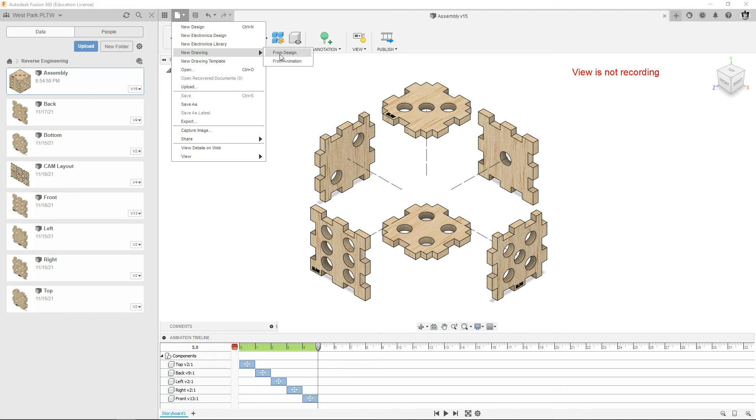We're going to go to our file menu up here on the top. We're going to hit new drawing from design. And some stuff will happen. Over here on the right, it's going to say, do you want to create a drawing? What do you want? The full assembly? That's what we do want. We want to create new, and then for template, we want WPHS A.

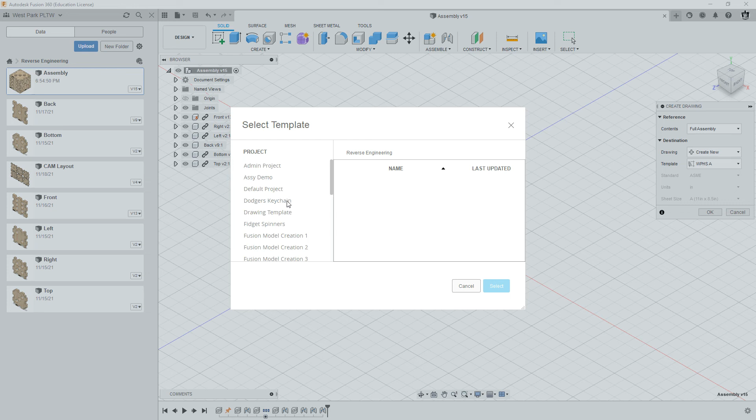If you don't have the template, then click here where it says template. You should be able to choose it. If not, you can hit browse and then go find it. It should be in one of your projects. I think multi-view drawing is the one that we put that in. So anyways, you get that template there, hit OK.

And then what it's going to do is take you into this new drawing. And so here's the drawing environment, and it'll pop up. You'll have a view of your die, and we're going to do multiple things in here. We're going to show a front view, top view, and side view of our assembled die, so we can put overall dimensions. What those are for is basically you want to know, if you've got to ship this thing, put it in a box, how big of a box do you need?

We also want to show an isometric view of it while it's assembled, so people know what the finished product looks like. And we're also going to show our exploded view so they know how to put it together and what the pieces are. Lastly, we're going to have a parts list, which shows the list of pieces you need in order to assemble one of these. And it's also going to have what are called balloons that label each part so you know which part each one is.

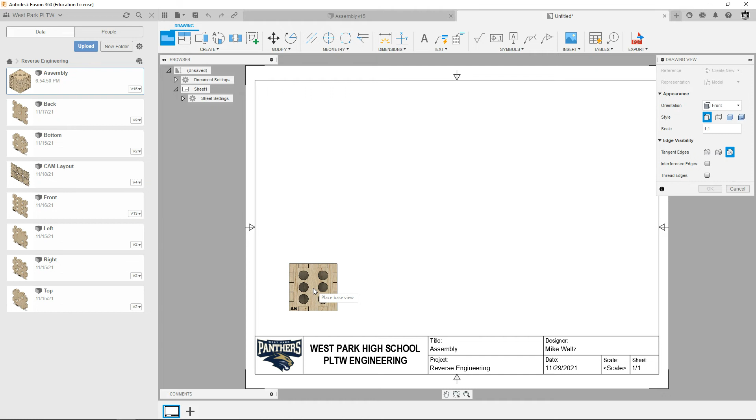Okay, so we'll do the easy stuff first, which is to do the front view, top view, right view. So orientation is going to be front. Style is visible edges. Usually in assembly views, you don't show hidden edges. We could if we wanted to, but let's just leave it off. And 1-to-1 should be fine to scale. So I'm going to go down here in the lower left corner and place that view. And then I should be able to hit OK. And then there's my view. I've got the front view of my die.

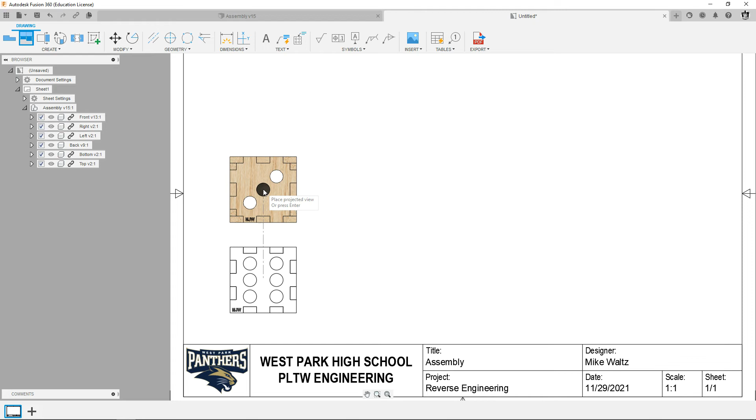We're going to create projected views. So I'm going to use a projected view tool. I'm also going to close this data panel because it's just taking up space on the screen right now. So anyways, this tool here, projected view, click on the front view, and then we're going to go up here. All right. And we'll get a nice top view of our cube. We're also going to go over here to the right. We'll make a right view of our cube. And then we're going to go up diagonally, top right, and make an isometric view. We can hit the green check mark. And there are our views.

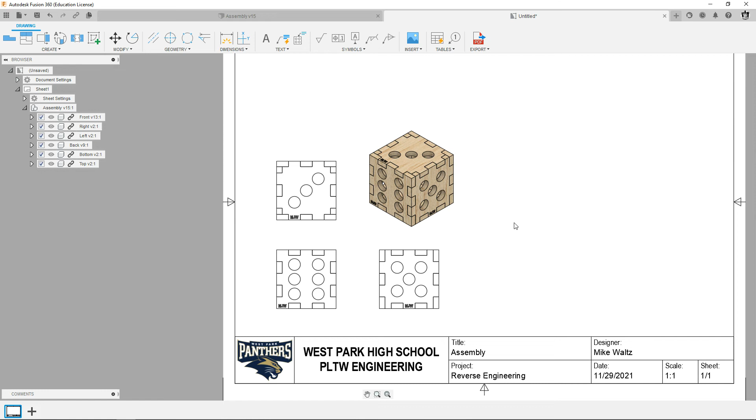We want to shade this view. So I'm going to double click on this view, move my mouse over it, double click, and I'm going to choose a shaded view and then close that. Okay, cool. So now we've got our isometric shaded view of the whole thing. We've got front, top, and right.

And we're going to put overall dimensions on here. So D for dimension, or you can click up here in the dimension tool. I'm going to put a height dimension down here on the front view. Put that right there. I'm going to put a width dimension here in the top view. And then I'm going to put a depth dimension over here in the right side view. Hopefully you remember what all those things are.

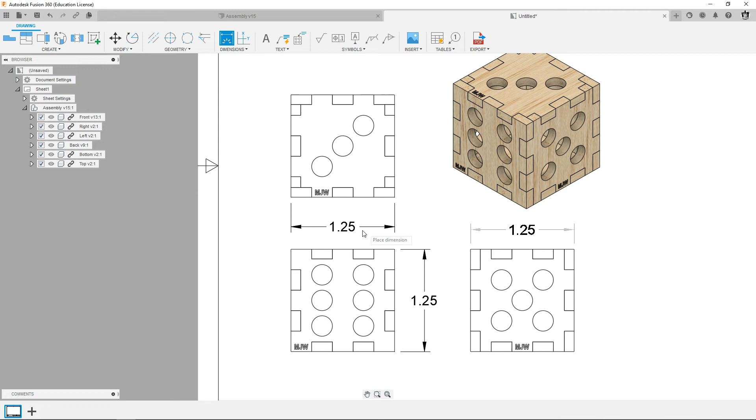Let's see, is it going to let me line that up? It wants to put it really far away. I'm going to line it up roughly with the other one. There, that's pretty good. And so this is just overall dimensions, so they know how big is this thing that we're telling them to make.

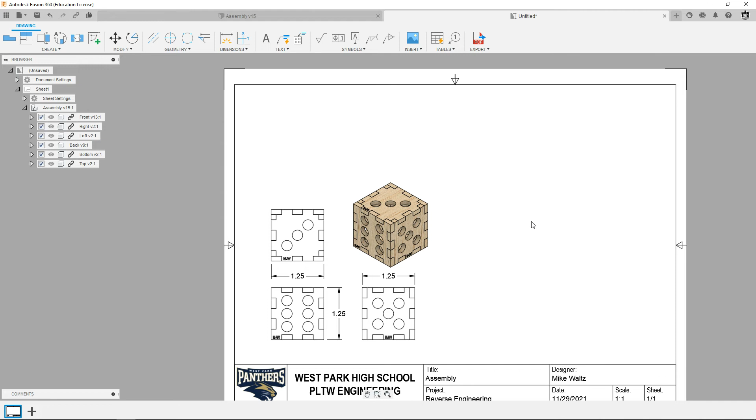And then we've got our isometric view right there. That looks good. So that's a basic representation of what they're supposed to make. And later we're going to add other sheets to this that'll show how to make each part. So we'll have the dimensions for each of the 6 pieces that you designed on separate drawings.

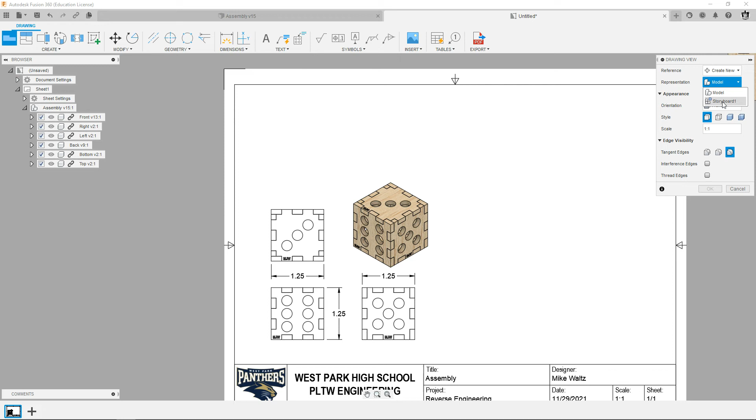The other thing we want to add on this sheet is the exploded view we created. So we're going to go up to our base view button and click base view. Over here where it says reference and representation, by default it has the model representation, but we're going to choose storyboard 1. So instead of showing our assembly model, it's going to show our storyboard, which is our exploded view. Click there, move your mouse back, and you can see you now have the exploded view in here.

We're going to keep using 1-to-1 scale. For this one, you want to use shading, so I'll turn the shading on. And I'm just going to put this wherever I want, right about here. It looks great, and I can click OK.

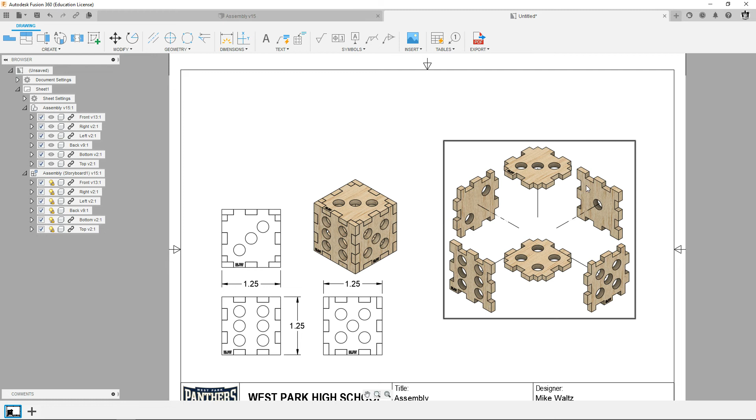Okay, cool. So now we're not only showing them what this thing is that we're making, but how do you put it together? How do the pieces go? So it shows all the pieces there.

Now the last thing we want to do is give them a way to identify what the pieces are. So for that, we're going to create what's called a parts list. It's also going to have these things called balloons that put a tag on every piece showing what part number it is.

So we'll go up here where it says tables, and you click on tables. There's an option here called parts list. When you click parts list, it's going to ask what view do you want to use. So you can see over here it says parts list, select. We're going to select the exploded view, click that, and then you can see what happens - on your mouse a little chart appears.

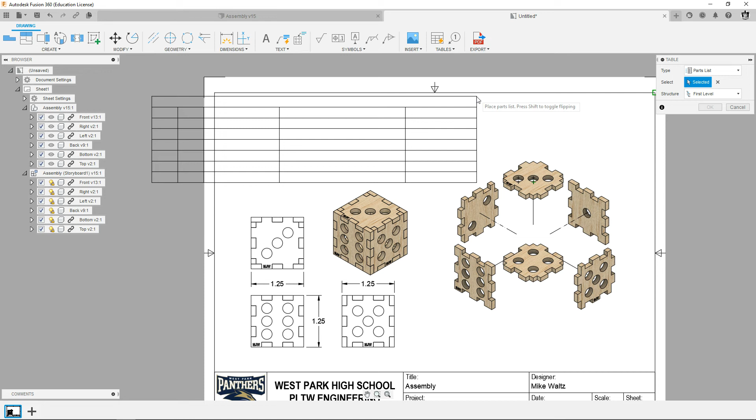And this is the parts list, and you can see it's kind of big. We could stick it in the top right corner, or the top left. It doesn't really matter - I'm going to go top left. Notice it'll snap itself in there. Also notice what it did - when I clicked, it created these balloons on the exploded view.

Now everything's kind of messy right now. We're going to have to do a little cleanup work, but this is really cool - we've got all this information here. So you can see in here, here's your parts list, and you can see it's got item numbers 1, 2, 3, 4, 5, 6. So it tagged all the parts with a number.

QTY - it doesn't mean that they're cute, it means how many do you need. So you need one of each piece. Sometimes you might need multiples of something. Then it has the part number, a description, which is empty, and then the material, which is birch for my project.

So what I want to do is edit this because it's taking up a lot of space and some of this information is not what I want. If you move your mouse over it, you'll see that it becomes highlighted, very black. If you get it there, you can double click. Once you double click, you get the little parts list tool over here, and structure - keep it as first level.

Direction is down. Item is good. QTY is good, quantity. Part number is fine, but really these are part names, so I'm going to choose the part name field and turn off part number just by clicking on it. And then description - well, it's empty. There's something, so you could go back and open these parts up and in their properties add a description, but we didn't do that, so we're going to turn that one off.

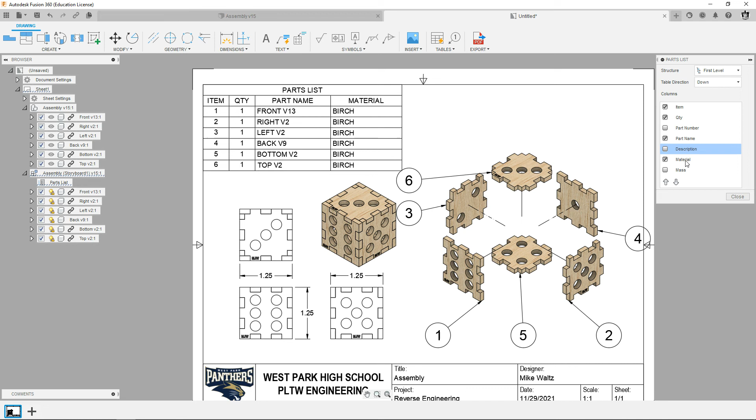And then material, that looks fine - it's got birch, and basically whatever you made your parts, that's what it's going to be. So if you decided to do acrylic instead, you might want to go back into your parts, edit them so they have the correct material, then update the assembly, then update the drawing. It's a lot of work, but you could get it so they all show up with the correct material. If you want to leave material off, that's fine - I'm going to leave it on.

Looks great. You could add the mass if you wanted - how many ounces are they - but this is fine, I'm going to hit close. Now this parts list actually looks pretty good right now. You can see these columns are kind of wide here, like this last one, especially material. You could click on it, and then these little dots - if you drag these, they'll let you make the columns narrower or wider.

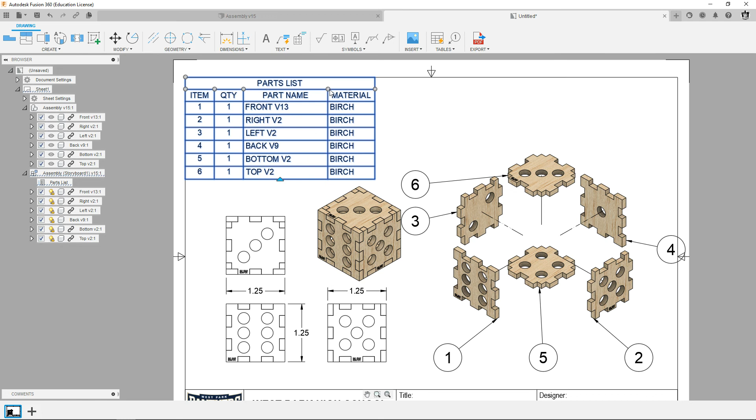So I'm going to narrow this down. Material, oops, that's too narrow. Bring it back, I can go over here and play with this. I want to make this as small as possible. It's not that important, but it gives me more room to have all my views in here. Okay cool, that looks pretty good.

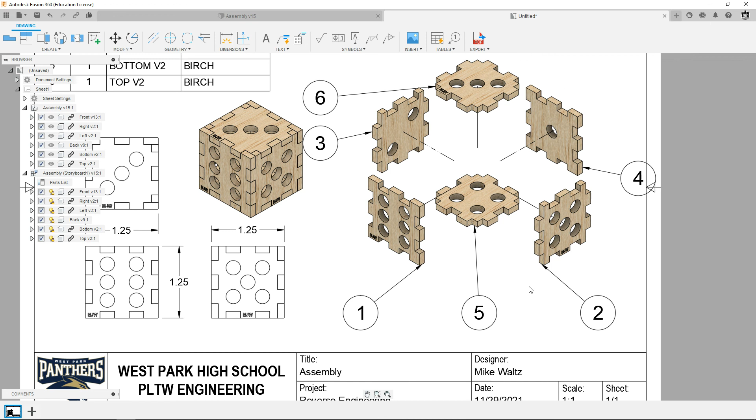The only problem is our balloons are a little messy, so we're going to go clean them up. Here's the basic idea: you want the balloons to touch the arrow, and the arrow to touch the part, usually at a corner or central point. You also want your balloons to line up—down here the 1, 5, and 2 are all in a row, and over here the 6 and 3 are in a row. We try to make them as organized as possible. Let's just go work on it one at a time. Yours will be different, but you can see how I do it.

I'm just going to take this one and make it point more to the middle. That looks better to me. The 5 is fine, I'm not going to change that. This 2, I don't like it. You can click on it and you get these little dots, and you can drag them wherever you want on the part. I'm going to put that right in the middle there. That looks good to me.

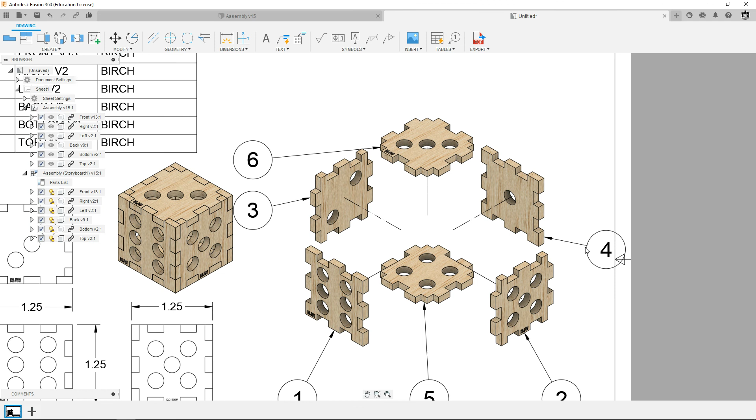Now this 4 is really problematic, it's going off the page. And this 3 is also a problem, it's going into the side. So instead of having these on the sides, I've got all this room up on top—let's move them there. I can take the 4, click on the arrow dot, drag that up to the top middle, and then drag the 4 up here. Drag it up here, and one thing you can do is even make this line up with the 2—if I put it over the 2 and go straight up, you can see it'll track it. I could put it directly above the 2 so it's nice and symmetrical.

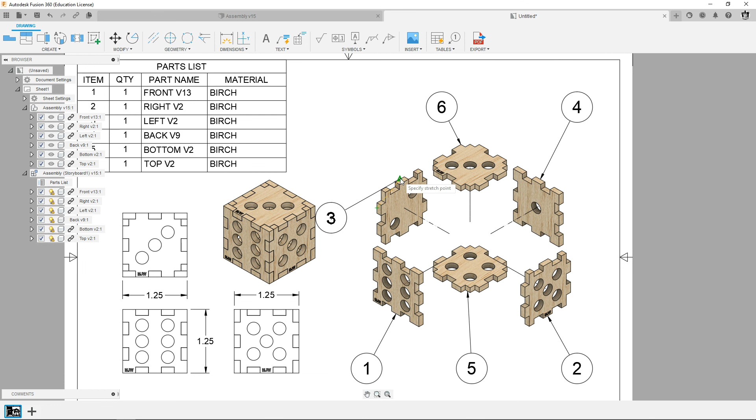Over here, you could take the 6—I'm going to drag this up to the top corner there, and drag the arrow up here. I want to line this up with the 4, so I put it over the 4 and you can see I get a little tracker. There's a rule of thumb in engineering that says you never want the arrows to go vertical or horizontal—I don't know where that comes from, but that's what I was taught when I was young. So I'm going to move this to the side so it has a little angle on it. Then the 3, I'll do the same thing: grab the arrowhead, put it up here on the top middle, zoom in a little more, grab the 3 balloon, highlight the 6, move over here, and drop it.

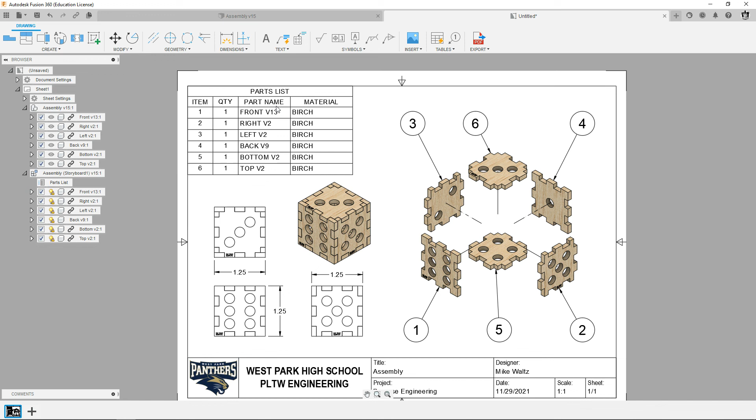And that is a pretty good exploded view, this looks pretty good now. I'm going to give a little more room to this isometric. Again, it shows them the overall dimensions of the thing, shows them what it looks like when it's put together, shows them what pieces they need to make it, and how to put them together.

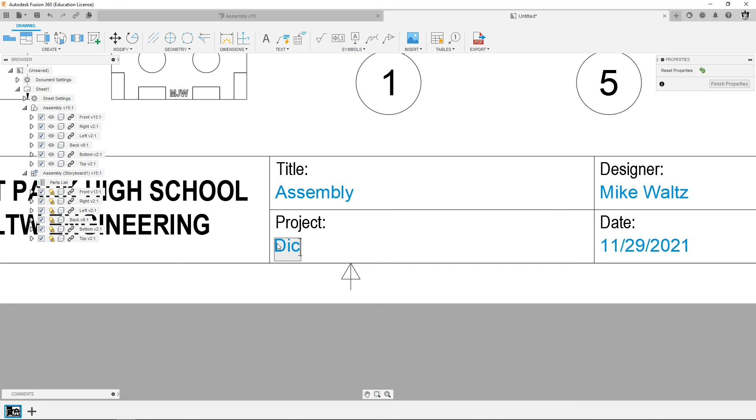Down here I'm going to address the title block. I've got assembly, that's fine—for this drawing we call this an assembly drawing. That's good. For the project though, originally I started out doing reverse engineering, but what I'm doing now is my dice. So I'm going to double click where it says reverse engineering, type in dice design, hit enter, and over here where it says finish properties, you can click there. Now I've got a really good drawing.

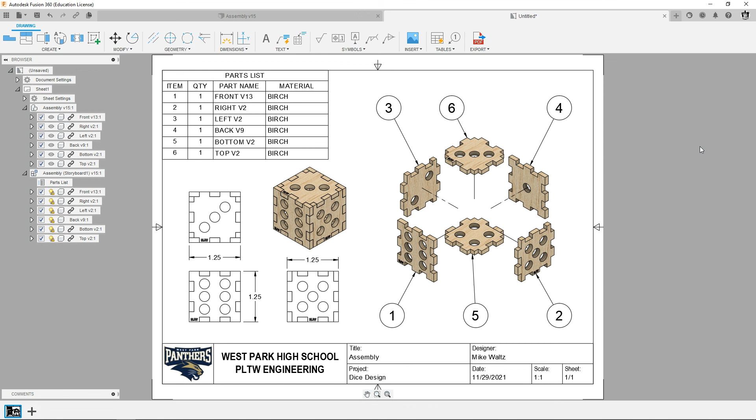Go on to the next video, and what we'll do now is add to this—we're going to add 6 more sheets. They will be a drawing sheet for each part of this, with multi-views and dimensions on it. Once we get all that together, we'll make one big PDF file that contains all 7 sheets, and that's what we'll turn in for points. So good luck, have fun, see you in the next video.